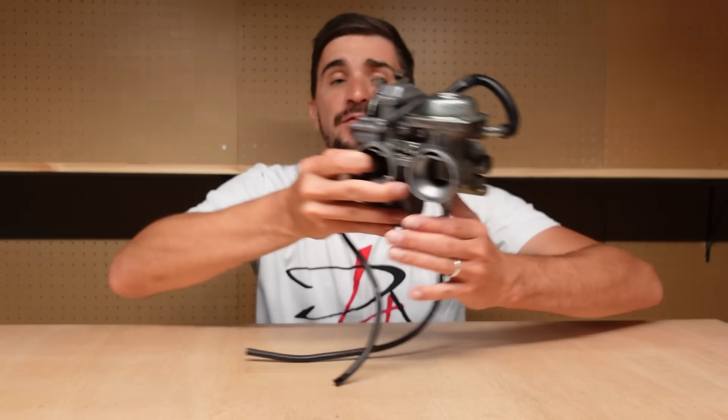They say that by looking at our past, we can predict our future. Well, here's a crystal ball from our past. This, as you can see, is a carburetor. But more importantly, it is also a bad idea.

It is a bad idea because with this particular design, Yamaha, or more precisely a Japanese carburetor and fuel and intake systems company called Teikei, tried to make this carburetor do something a carburetor cannot do: behave like a small and a big carburetor at the same time.

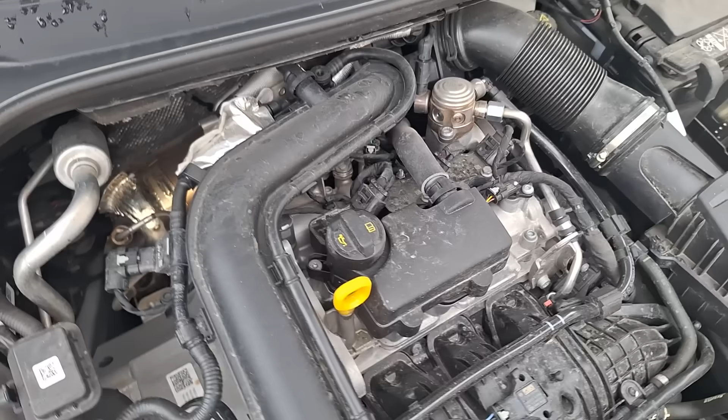Sort of like what we're doing with small 1-liter 3-cylinder engines nowadays, trying to give them the performance of much larger engines while maintaining the fuel economy and emissions of a 1-liter 3-cylinder engine. History teaches us that two-stage carburetor designs like this one were quickly replaced by simpler carburetors and/or fuel injection. They sounded great on paper, but in the real world they offered no benefits and were very hard to tune.

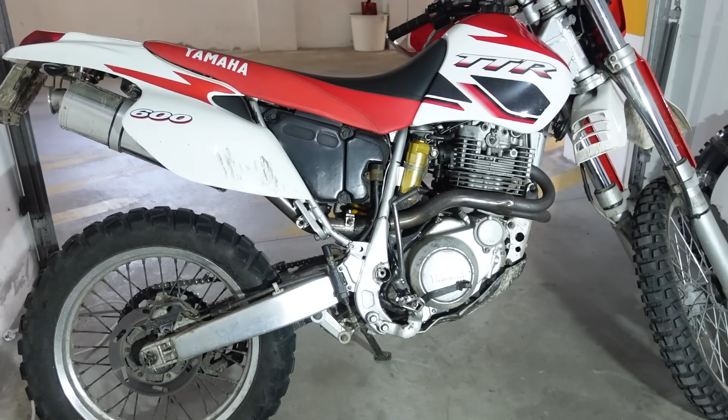But you see, there's a problem. This particular carburetor comes from my Yamaha TT600R, a motorcycle that I have a very deep and complex emotional and sentimental connection with. It is a kickstart only motorcycle that is also cursed.

I've been working on it for the past 10 months, but I can't get it to start easily and run right. And I'm this close to getting rid of it and just buying something slightly used, newer, or completely new with electric start, and just ending this nightmare.

But I really like the bike and I just can't give up on it. And so I keep giving it one more chance, and one more chance, and one more chance. I've replaced pretty much all the electrical components. I replaced the rotor. I even turned the capacitor into a lithium battery to improve things. And I replaced a bunch of other parts. I got 2 aftermarket ignition boxes, you name it.

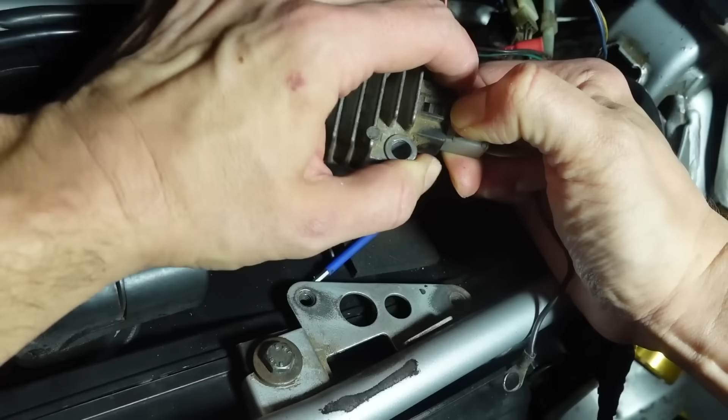I have improved things, but it still doesn't start easily and doesn't run the way it should. And now I'm 100% sure that this is the final boss, this is the culprit, because I cannot tune this carburetor to function the way a carburetor should. I'm not a carb tuning guru, but I'm also definitely not a beginner. I got a car engine to run on motorcycle carbs, and I've done numerous carburetor rebuilds and tunes, both on 2-stroke and 4-stroke bikes, but this one, no.

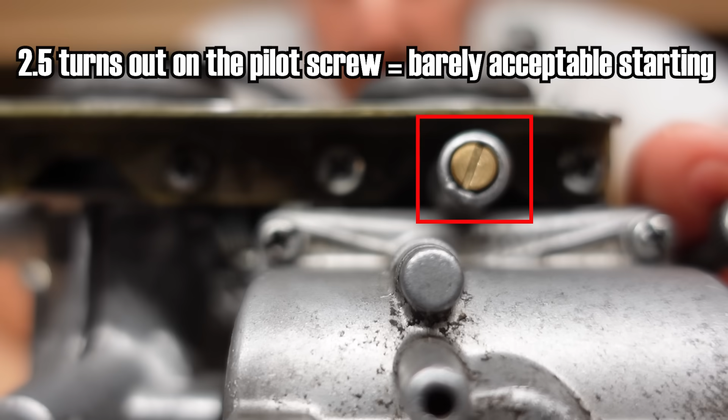Here's why. To get the bike to start, sometimes it wants 2.5 turns out on the pilot screw, the fuel screw, which is right here. With that setting, it starts sometimes. And when you start it and get the bike to warm up, you ride around.

And then if you turn the fuel screw out 3 turns, you're going to feel a very noticeable improvement in power and responsiveness from low RPM. The bike feels more alive. It is telling you that's the right setting of the pilot screw, and the factory service manual also agrees with you.

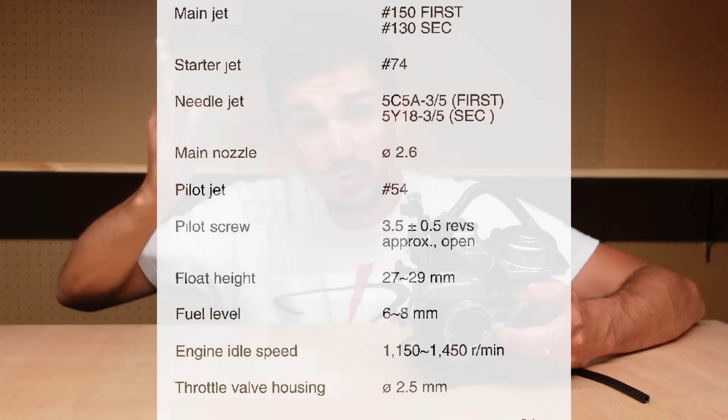But when you finish your ride with 3 turns out, come back home, turn off the bike, and then want to ride it in a few days, it will not start with that setting of 3 turns out. It will kick back most of the time, which is very annoying and kind of painful, and it also scares you.

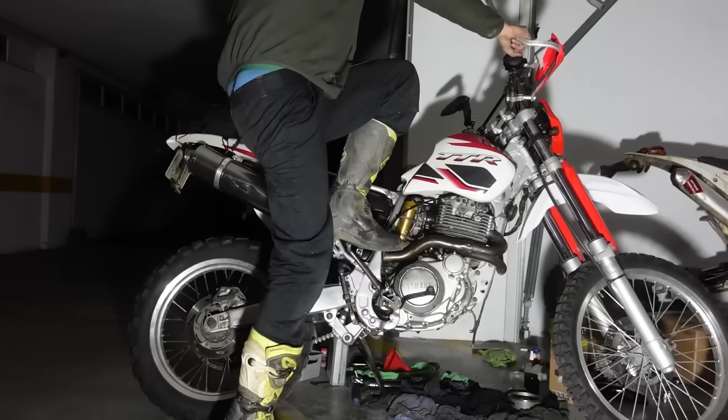Or it will sputter, or it will sort of start for a millisecond and then just die. It will do everything except starting.

And then you have to put it back to 2.5 turns out, which is not easy. You have to get under there in the carb. It's all a big pain.

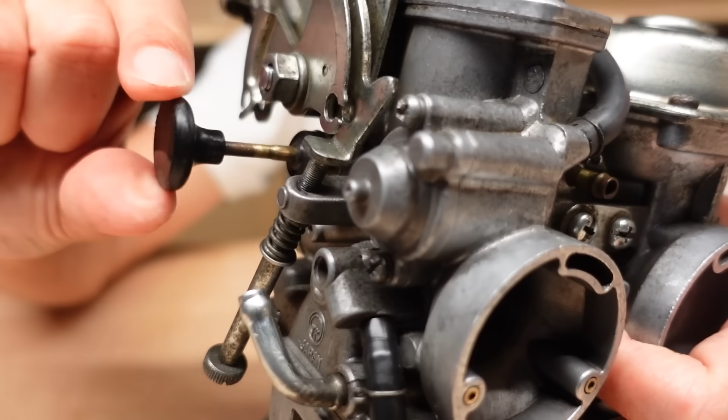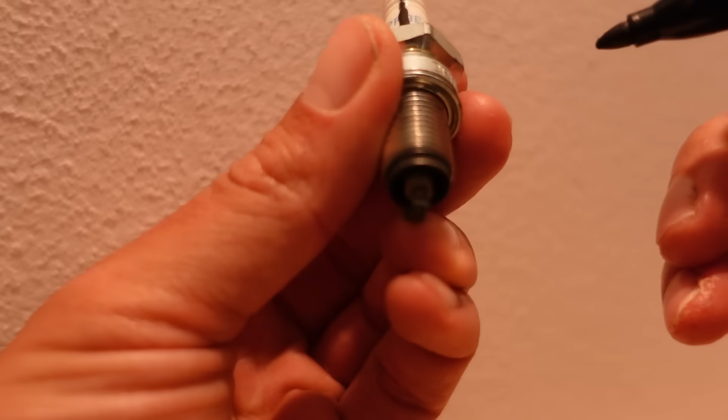And I have tried everything. When I say everything, I mean everything. I have tried every possible setting of the choke, every possible setting of the idle speed setting. I have tried priming the engine, a bit of throttle, more throttle, less throttle. A lot of throttle gives you a lot of kickback. I have tried new fuel, old fuel. I have tried different pilot jets. I have tried air filter on, off. You name it, even silly things like indexing the spark plug, increasing the spark plug gap to be larger than factory recommended. None of it works.

It will not start. But here's the final nail in the coffin of this stupid design: even if you get it to start easily and run right, and somehow manage to tune it magically to be perfect, this thing is a two-stage carburetor. So at idle, low, and sort of medium throttle, only this carburetor works. It is only this one that supplies fuel to only one of the intake ports of the engine.

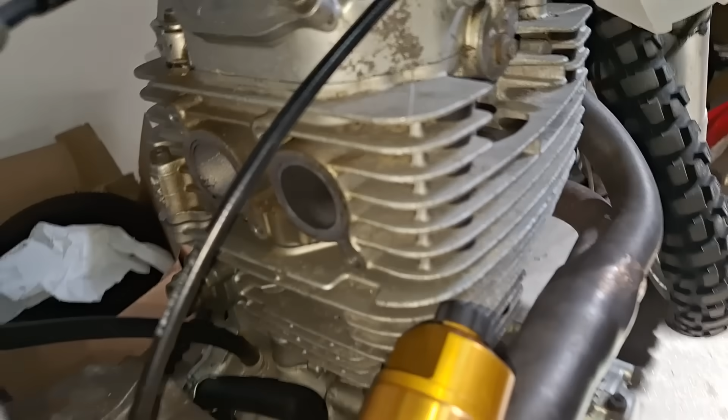As you increase the throttle, somewhere beyond half throttle and RPM, this other constant velocity carb lifts up and joins in, providing fuel to the other intake port of the engine. Because the intake ports on this engine are physically completely separated, one of them stays beautifully clean, whereas the other one gets nasty and dirty, since that carb doesn't run all the time—a lot of the time, on a 600cc single, you're just doing a bit of throttle. So even if you tune this perfectly, you will not get rid of this inherent, annoying feature of this and all other two-stage carburetor designs. It's not detrimental to engine longevity or performance, but it is just annoying.

So I decided to install a completely different carburetor onto my Yamaha, because that was the only problem it still had. It wasn't the fact that it's a 26-year-old piece of garbage—it's the carburetor.

So I decided to replace it, but there was an obstacle: the Yamaha TT600R was never a global nor a very popular model, so the aftermarket for it is pretty much pathetic. Yamaha themselves still only make some bolts, some gaskets, and the oil filter for this bike. That's it. Basically, nobody really cares about this bike anymore.

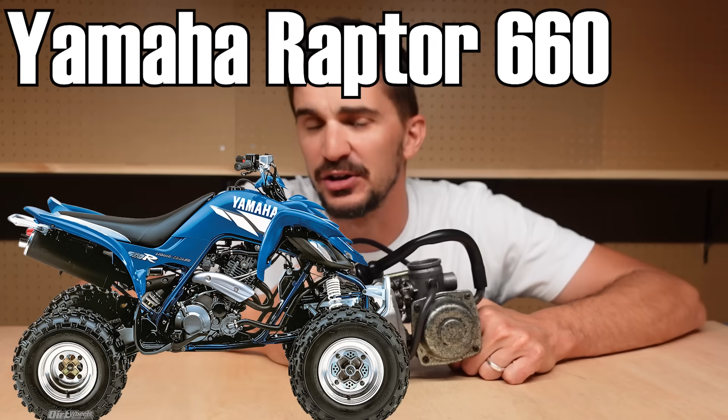It has 60 more cc, but it also has a beautiful, and most importantly conventional, Mikuni BSR 33 carburetor. These bore diameters are the same in both carbs, and the distance between the bores is also the same, which means all I needed was some very mild mutilation of the stock intake boots to get the new carb to beautifully fit onto my bike.

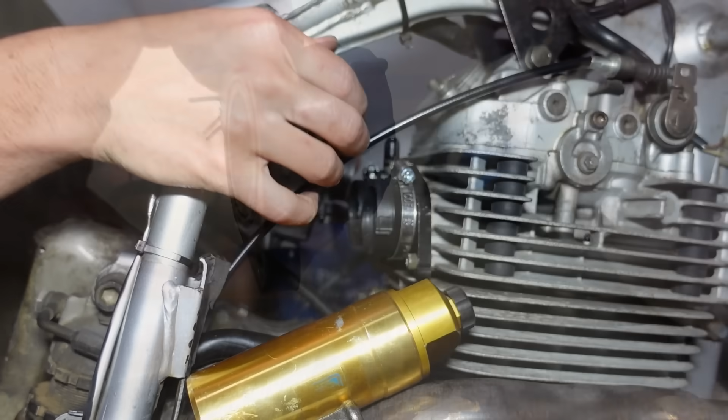Another good thing is that you can find dirt cheap Raptor 660 knockoff carbs on Amazon, which allows you to experiment inexpensively—which is exactly what I did.

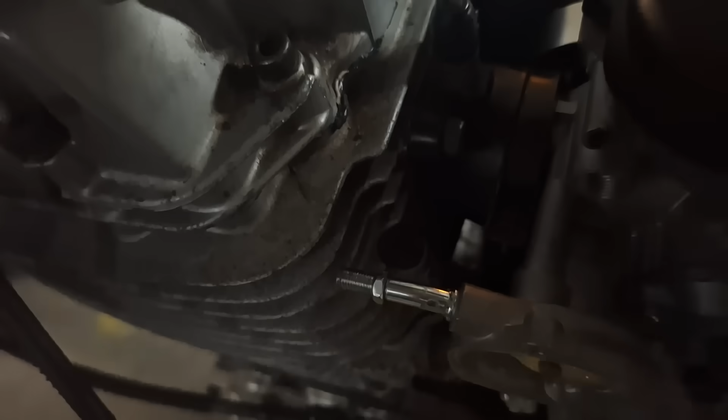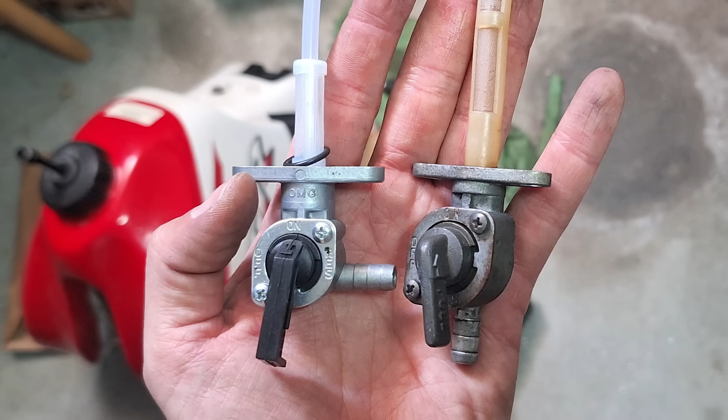Of course, when you try to do silly conversions like this one, nothing is straightforward. For example, the throttle cable tube was hitting my cylinder head, so I had to make a totally different one using a hose fitting. The stock fuel petcock also didn't clear the new carburetor, so I had to get a different one, but then the stock choke didn't clear the new petcock, so I had to get a different choke cable with a curve in it to clear the petcock. Surprisingly, the choke from a Harley Davidson fits perfectly. All of these were problems, but they were easy enough to solve.

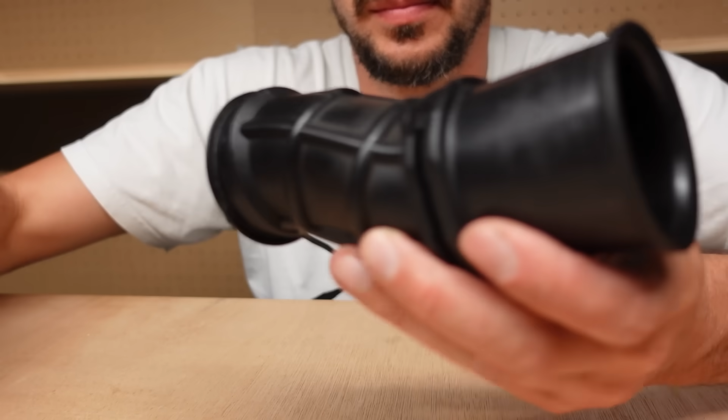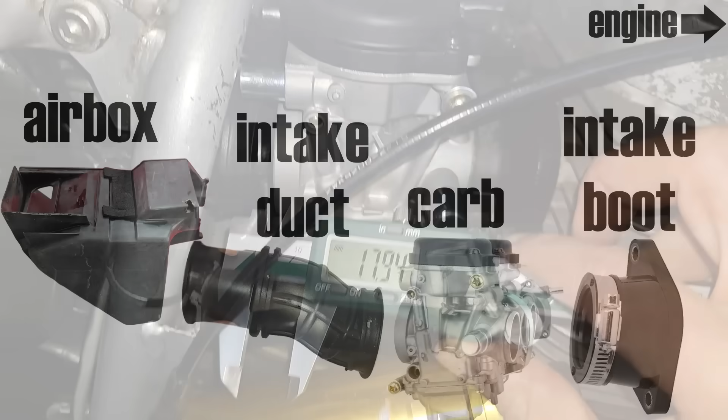What followed was a problem that was not easy to solve. These are the stock intake hoses which connect the stock airbox to the carburetor. With the new carburetor in place, they were now too short, offset, and one of them had a completely wrong diameter, meaning there was no way to connect the new carb to the airbox. I didn't know what to do, so I googled around.

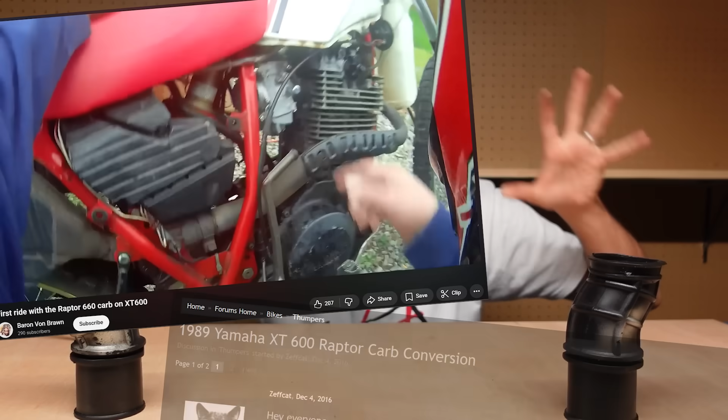To my surprise, I found a few more people online doing this exact conversion: Raptor 660 carbs onto a Yamaha TT or XT600 motorcycle. But the solution they found was to simply completely eliminate the stock airbox and install tube or pod filters, or whatever you want to call them.

This might be fine for a street-only motorcycle, but I ride this bike pretty much exclusively off-road. Off-road there's a lot of dust and dirt, and pod filters simply don't filter as well as off-road oiled filters, especially when completely exposed to the elements, so engine longevity might be negatively impacted. Also, exposed pod filters get very dirty very quickly, so you'd have to change them all the time. And if you ever drop your bike during a water crossing, they get completely soaked with water, water probably gets into the engine, and then starting or kick-starting your bike again is pretty much impossible.

And so in my case, the airbox had to stay. It's simply the best solution for an off-road motorcycle. And to adapt the new carburetor to the airbox, I decided to undertake a pretty ambitious DIY adventure to do something that I have never done before: design and make from scratch a completely custom rubber flexible intake hose, aka intake duct.

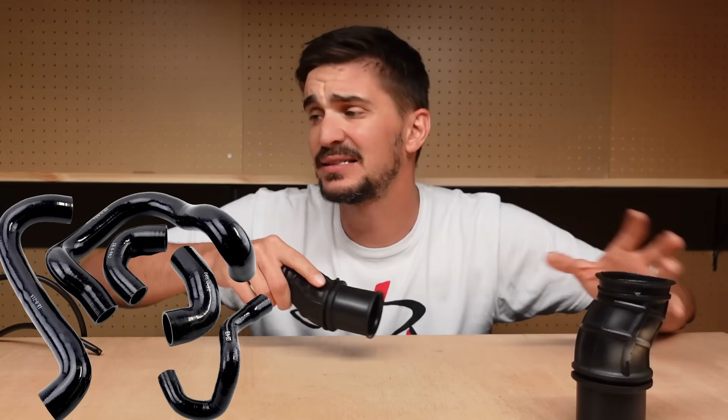As you can see, in the end, I did it, but it was not straightforward. But I did learn many valuable and useful DIY lessons, all of which I'm going to share with you in this video, so that you too can make completely custom intake hoses and ducts, adapt pretty much any carb or throttle body to any engine, make custom intercooler hoses, turbo hoses, other intake stuff, coolant hoses, you name it. You can do all of it yourself.

Before I even started the project, I decided that I was going to 3D print the new intake ducts in my Bambu Lab H2D printer using Bambu Lab TPU filament, thermoplastic polyurethane. I decided this because in the past I had already printed successfully some simple TPU parts, some gaskets, and so I figured an entire intake duct shouldn't be much harder.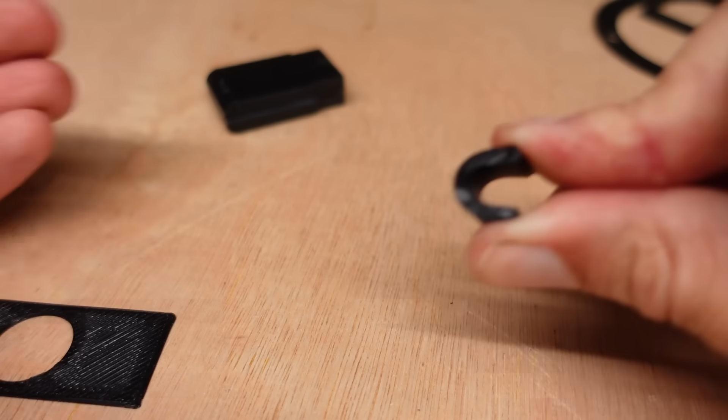But before I could 3D print anything, I needed a 3D file, a CAD file of what I was going to print. And I needed to draw something similar to the stock pipes, but a bit longer and offset a bit differently, with a different diameter on one of the pipes.

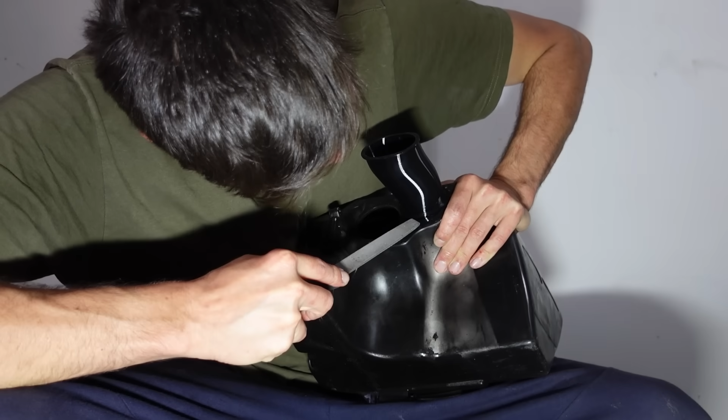The problem is that these are extremely complicated parts, way more complicated than anything I have ever drawn before. For example, in the airbox there's a little notch, and that notch corresponds to a little tab or protrusion on the pipe that locks the rotation of these pipes in the airbox. The two pipes are different because they're mounted at different heights on the airbox. They have different offsets, some flat parts, some curved parts, and they are irregular and offset in pretty much every plane. So to get this to fit, I have to get every dimension absolutely correct, because everything has to correctly reference everything in all three dimensions for this to fit even closely.

And I know what you're thinking: hey, get a 3D scanner. This is the perfect candidate for 3D scanning. And yes, it is—it's black, it's not shiny, it's complicated. But 3D scanners are not cheap, and I was not going to get one just for the sake of this one project. Yes, I know people do 3D scanning with their phones, but I have an ancient, cheap, horrible Android phone with a horrible camera, and I was not going to upgrade for the sake of this one project.

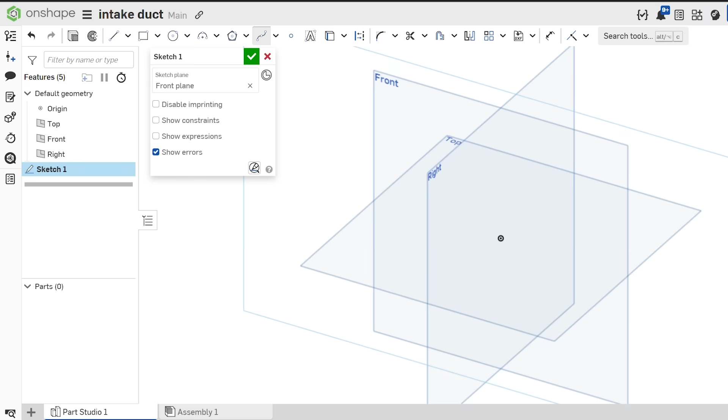And I was confident that it can be done more simply. So I went full old school and just measured everything by hand using a caliper, trying to get as many dimensions as humanly possible. After that, I opened up Onshape, drew a spline based on the dimensions I took, did a sweep along that spline, and then shelled out the resulting part to create my intake pipe.

Once I had my drawing, I opened it up in Bambu Studio and printed it. I used the automatic TPU printing settings, which the system selects for you when you choose the Bambu Lab TPU filament, and the pipe came out absolutely perfectly on the first try. And here it is, a fully 3D printed intake duct. It looks amazing, but I'd be lying if I said I was surprised by how well it came out on the first try, because honestly I'm kind of used to things working perfectly on the first try with my Bambu Lab H2D. However, what did surprise me was just how insanely strong this thing is.

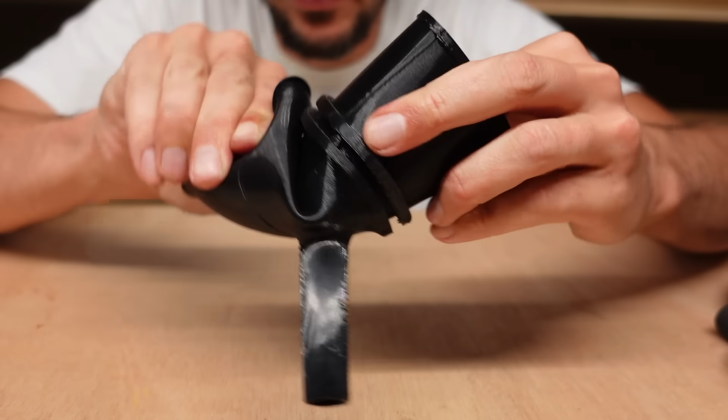You can stab it with a screwdriver. You can try to twist it and tear it apart. You can do whatever you want with it, but it will stay intact. It is just as strong as the factory rubber part. The strength caught me off guard to the point that I wanted to find its limits. So I quickly drew up a super simple container to test the maximal internal pressure something like this can take. After the H2D printed past this hole, I hit pause.

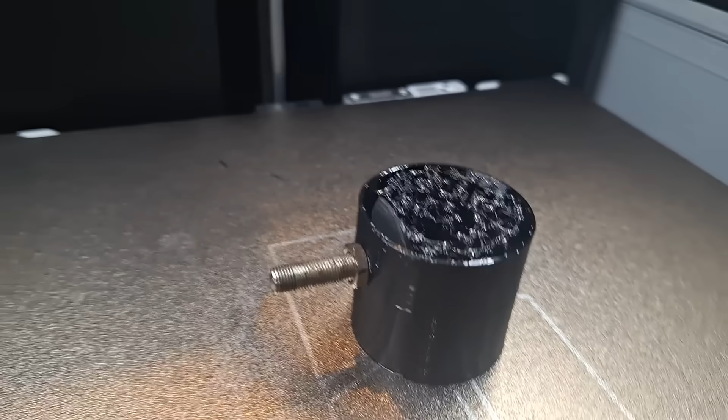I then moved the bed down and inserted a tube valve through the hole. And then I let the printer resume.

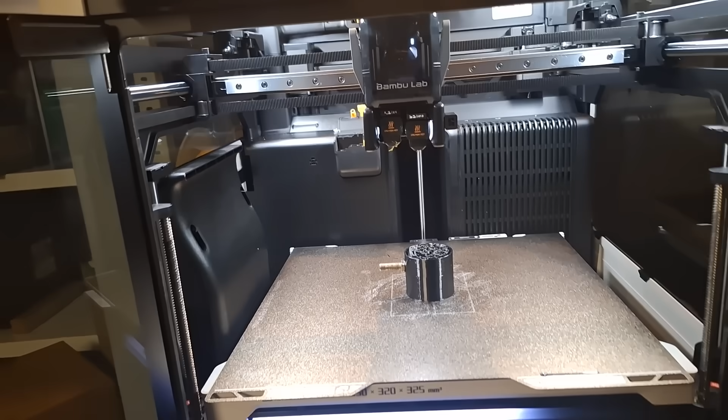My Bambu Lab H2D automatically references everything, so once I hit pause and resume, I can do whatever I want in the meantime, but it remembers exactly where it stopped and where it needs to continue. So the only thing I have to do is hit pause and resume.

And this of course means that you can get very creative and insert all kinds of things into all kinds of holes and slots and then continue printing, and they're going to remain trapped or fixed in their hole or slot. This opens quite a few very interesting DIY possibilities.

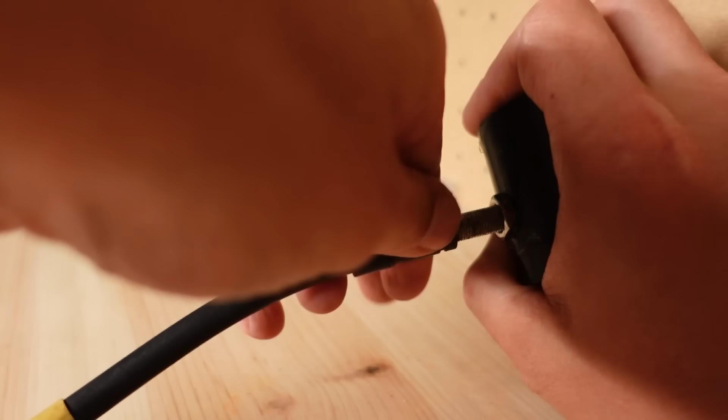Once the part was done, I let it settle and stabilize overnight, and then tomorrow I tried to inflate it to a pressure of 150 psi, which is approximately 10 bar.

I can't believe it inflated to 150. I really hope the valve stem is leaking or something, because I do not want to go there now. No, it's holding 150. This is insane.

Okay, this is version 2.0, which I did make a bit thicker because the previous version, the one that you saw printed, that was thinner, 1.5 millimeter wall thickness. This is 3.5 millimeter wall thickness, because that helps the valve stem seal a bit better.

My whole method of valve stem insertion isn't the best. But honestly, I still can't believe it's holding 150 psi or that it survived that for any amount of time. That's insane.

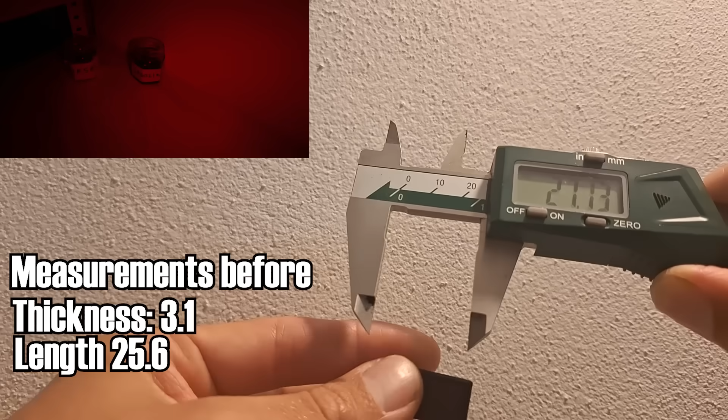Another test I did in parallel is that I dunked my old TPU seals inside gasoline and diesel and let them sit for 3 days. They remained perfectly intact and completely unaffected by either one of the fuels. They didn't swell or become weak or brittle or anything else.

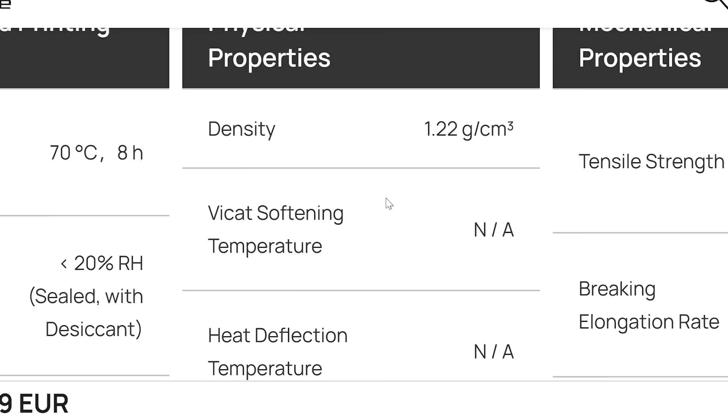So it's super strong, it resists both gasoline and diesel, it can take high internal pressures, it's already well known that TPU can take coolant without any issues, and it has a melting temperature of 183 degrees Celsius, which means that this thing is right at home on a motorcycle or a car, right at home in the engine bay. You can make any kind of duct, hose, you name it.

Back when I was doing my Project Underdog Turbo 4AFE Toyota MR2 Mark I, I didn't have a 3D printer, but honestly, if I had, it would have made things so much easier, because what we were doing the whole time is fabricating little metal brackets and things so that we can position things to fit the only kind of hoses that you can find in the aftermarket, which is you have straight or 45-degree bend or 90-degree bend, and that's it. And you have to work around that, but not with this.

But printing TPU is a bit different. It's not harder, just a bit different to printing your classic plastic type filaments.

And in order to achieve these kind of results that I have achieved here, there are some very important things that must be observed. Number one, you have to dry the filament beforehand. This is a must. It is non-optional. I recommend drying 16 or even 24 hours.

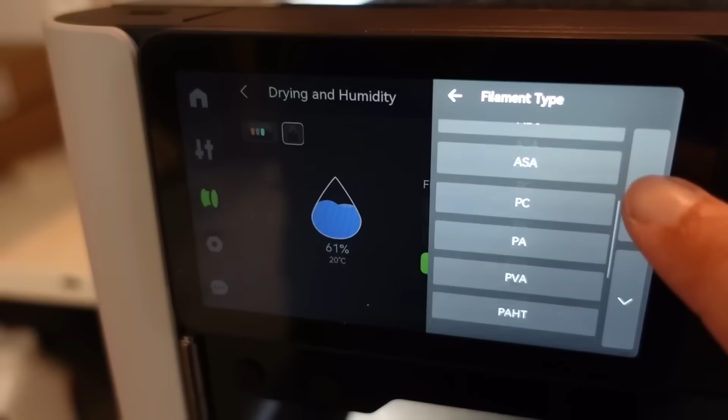I use the AMS HT, HT being high temperature. I love it because it fits perfectly into the Bambu Lab ecosystem. You just load the filament, you choose what kind of filament you want to dry, and then it automatically selects the temperature and the drying time, and then you can choose whether you want to rotate the spool or not, and that's it, you're done.

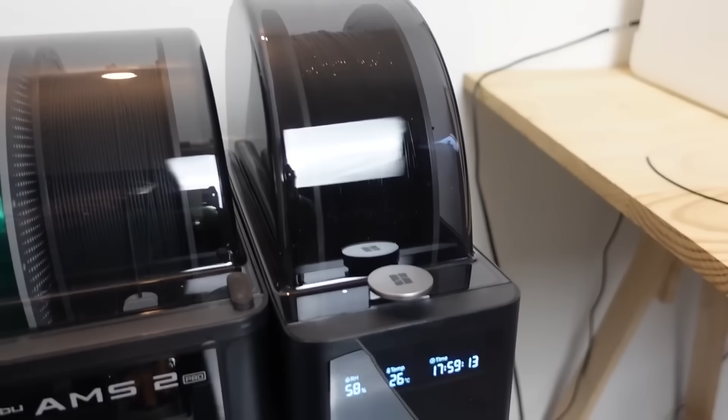But the best thing about it for me is that you can start new drying cycles using just your phone. You can load the filament, and then you don't have to be at home when one drying cycle finishes and you want to start another one. You just access the AMS HT through the Bambu Handy app and just start another drying cycle. This is incredibly convenient. I used it hundreds of times already, because often I like to do 2 or even 3 drying cycles, and when one ends, I'm often not at home, and this makes it super convenient.

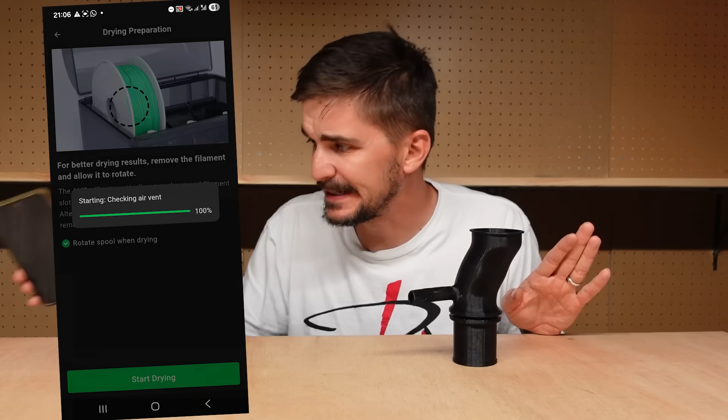The other very important thing once you're done with the drying is how you load the filament into your printer. I highly recommend to get rid of all PTFE tubing, hoses, whatever you want to call them. Load it manually directly into the extruder. This way the TPU filament will never get stuck. You will never have a failed print because of stuck filament.

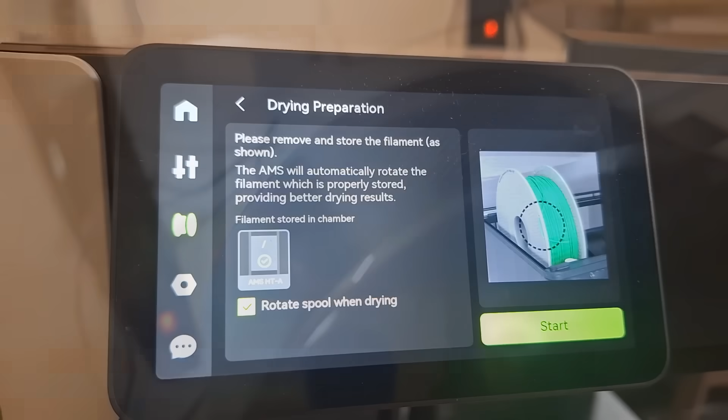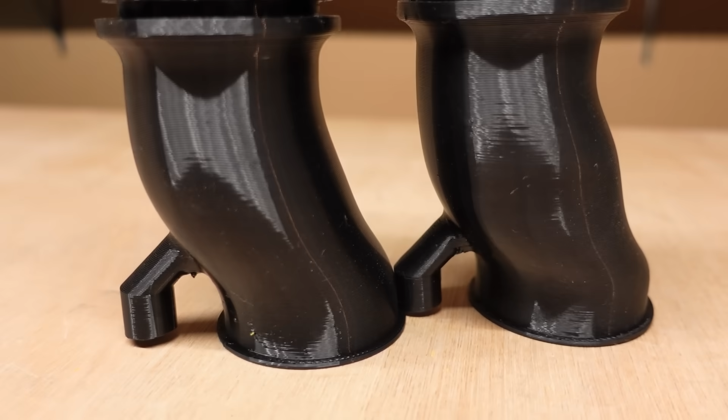A pro tip here is to keep the filament inside the AMS HT while you're printing. Load it manually through the little convenient hole in the lid of the AMS HT and then into the extruder, and then set another drying cycle while it's printing, only without rotation this time, so the extruder can easily pull the filament. This prevents the filament from absorbing moisture during the print, and it ensures perfectly consistent quality across the entire part, which is the secret sauce to ultimate strength.

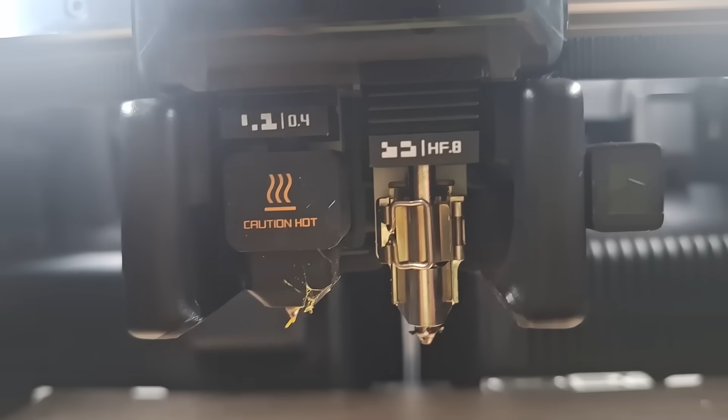The other two important bits are to use a 0.8 high flow nozzle. That's what I used, and this thing is worth its weight in gold because prints that lasted a few hours are now 20 to 30 minutes, and the thick big extrusions make the part stronger.

And finally, while printing, remove the lid of the printer and keep the door totally open, because TPU is extruded hot but needs to cool down as fast as possible for ultimate strength and performance.

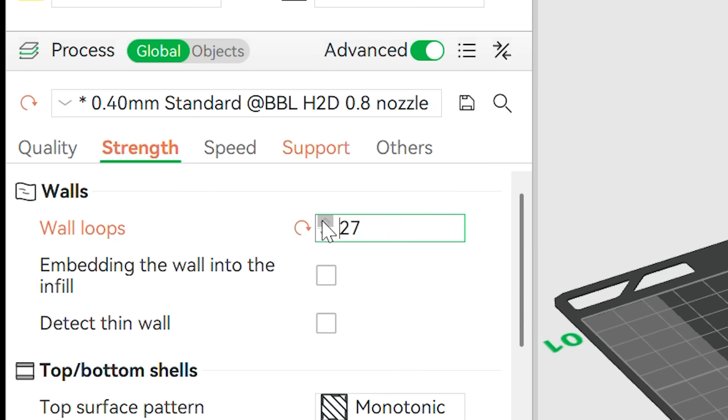When it comes to the printing settings in Bambu Studio, make sure to increase the number of walls to some silly number like 20 or 30 to ensure that the part is solid TPU without any infill, which leads to ultimate strength. All the other settings I leave as is, and they are automatically pre-selected by the software when you choose the TPU filament.

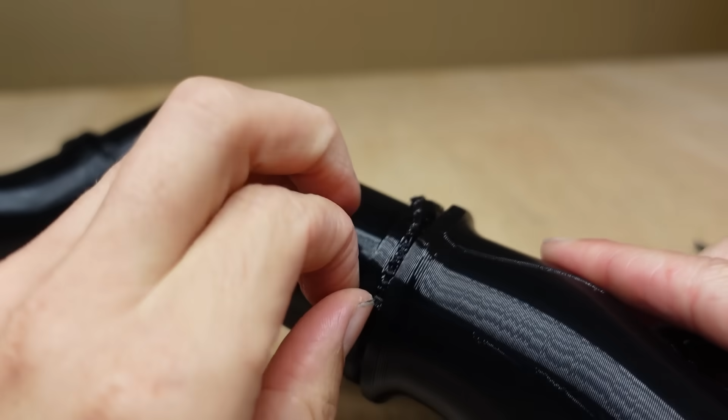The only thing I have changed is the top and bottom Z distance. I increased this to 0.3. This makes support removal easier while still retaining perfect strength. I have used same material support for convenience and simplicity.

I'd also like to point out just how cost-effective this is, because I printed out all of these gaskets and seals and all of these intake tubes, plus 2 more that are on the bike, from just one roll of Bambu Lab TPU, and I still have around 40% of it left.

And the size of the Bambu Lab H2D means that you can print much larger parts than the ones I did. So I had made a part which was super strong, very resilient, also very pretty, and also a total failure.

It was a failure because my dimensions were totally off, as much as 5 or even 10 millimeters in some places. The only thing I got right were the diameters, these two at the ends, nothing else. I just couldn't fit this properly.

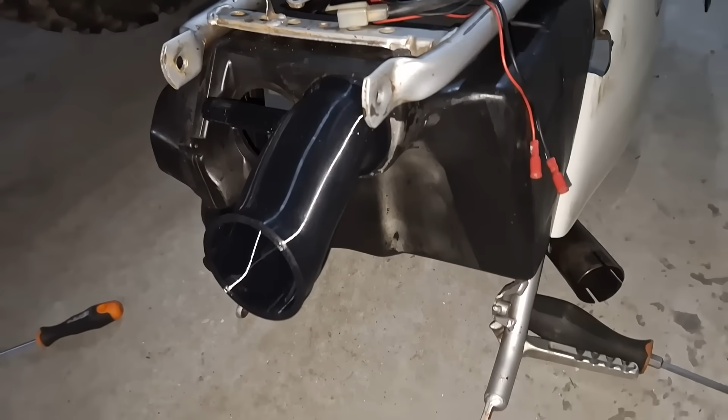This idea to use this hose takeoff and then attach or glue a regular hose from the parts store and then connect that to the diaphragm breathers on the carb, that didn't work either, because I overestimated the amount of space available within the confines of the frame. There's not a lot of space at all. This didn't work. This thing just didn't fit.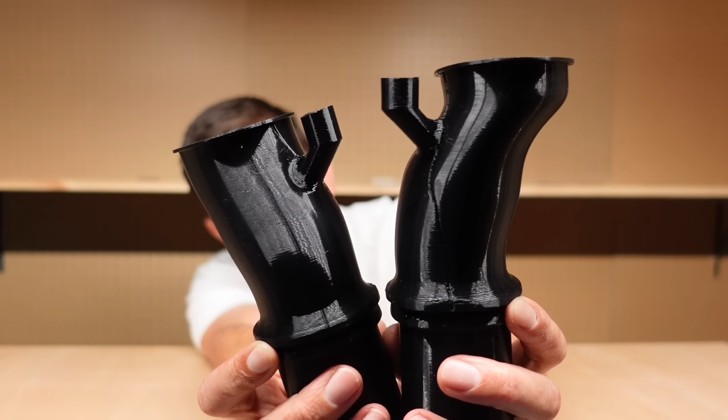So I set it aside, went back to measuring, tweaking, drawing again, and I made version 2.0. As you can see now, the diaphragm breathers are integrated into the tube, so there's enough space. I can just push them onto the carb, but this was also a failure.

I got the angle of one of these right, the other one I got wrong in reference to the center of the main carb diameter. I got other things wrong that were somehow previously right before. This didn't fit either.

And then I realized that trying to get it to fit, trying to get dimensions right like this by measuring by hand with the caliper, essentially boiling down to eyeballing things, it was never going to work. So then I got to thinking and tried to be creative, and eventually I came up with a sort of very simple and kind of primitive approach that was also kind of genius.

What I did is I took a perfectly frontal, straight photo of the stock intake hose. I then imported the photo into Onshape and resized it to match a known correct dimension. After that, I just drew circles along the path of the hose photo, and I lofted all the circles together and then shelled out the part to obtain my final hose shape.

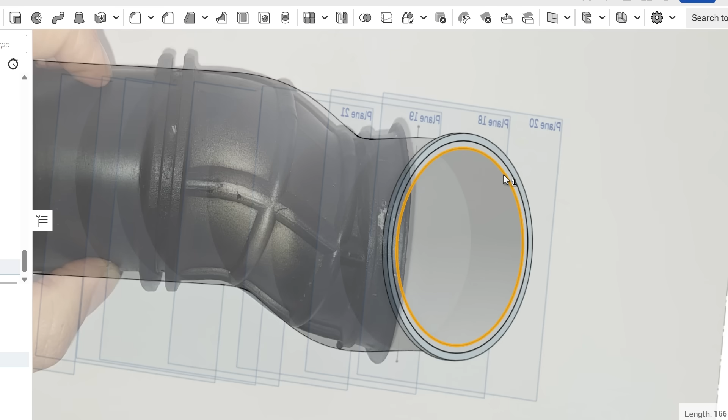I did the same trick with the carburetor. I took a perfectly frontal photo and then resized the image in Onshape until the diameter of the intake matched. I was now able to measure the angle between the center of the carb and the diaphragm breather with perfect accuracy, which meant I could accurately implement it onto my hose as well.

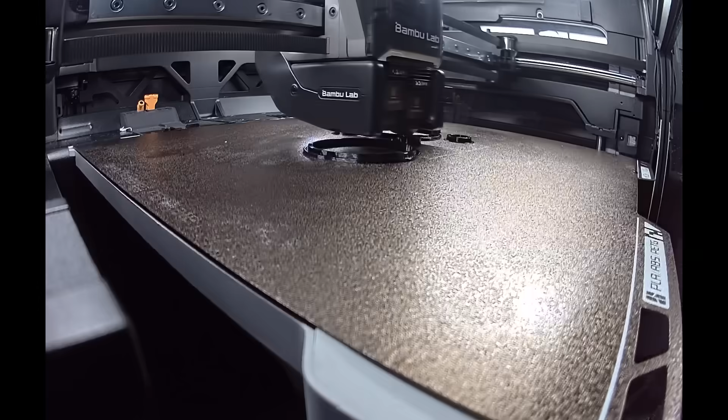I printed the new hoses out and voila, they fit perfectly. There you go, 0% 3D scanning, 100% accuracy. All it took was the right software features and a bit of creativity. Once I had the hoses ready, it was time to install them and put the bike back together.

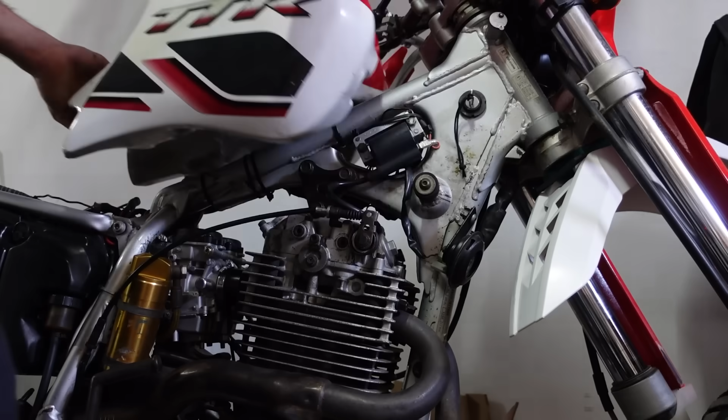And once the bike was assembled and the moment of truth came, I couldn't try to start the bike. You see, this motorcycle kicked back so many times in the past that I think it probably traumatized me or something. I didn't try to kickstart it in a month, and it seems that during that month, somewhere in my subconsciousness, a very strong reflex or fear had formed, and I just couldn't start the bike.

It was a very weird, very strange experience. Never happened to me before, but I just couldn't try to start it. So what I did is that I pushed it up the slope in front of my garage and then tried to just push start it, and to my great surprise, it started on the very first try.

This never happened with the original carbs with 3 turns out on the fuel screw. It would never push start. I tried many times. The bike would just clatter or make some weird noises or lock up the rear tire and just slide across the garage. But now it started on the first try, and to my great surprise, the Amazon carb seemed to have pretty good fueling out of the box.

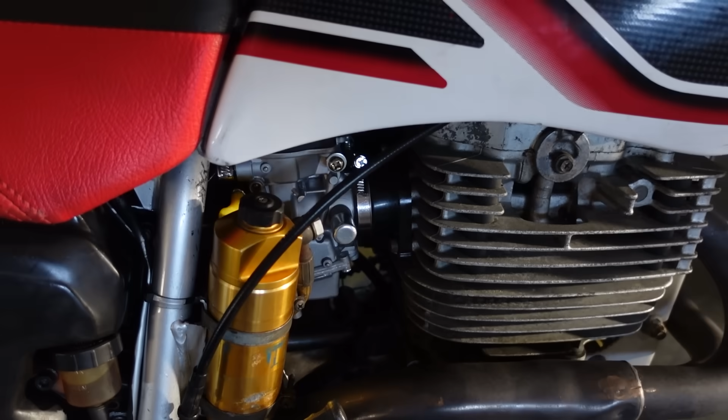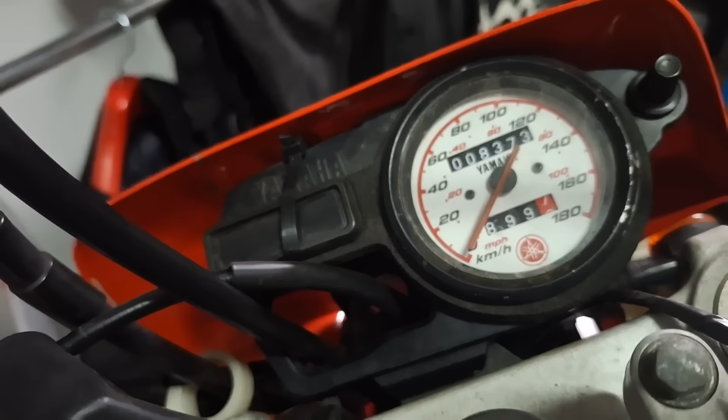The rational modern approach would be to just get rid of this motorcycle and buy something modern, more efficient, whatever. But I want this bike. I like this bike. I like its analog, brutally simple mechanical nature. I like the fact that I don't have to turn off ABS and traction control every time I start the bike because this bike doesn't have any of those electronics. I like the fact that it has a needle instead of a LCD. I like all of that.

I'm not saying that modern bikes are bad. I might buy one sooner or later. It's great to have that too. But I also want to have the freedom and the ability to keep this bike, to have it and to improve it and to keep it alive without having to be at the mercy of the aftermarket or Yamaha.

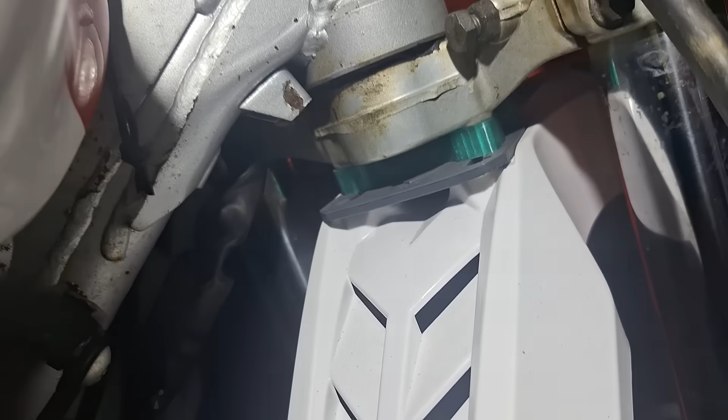And that's what 3D printing is allowing me right now. I have a bunch of other 3D printed stuff on this bike. For example, I made an adapter for the front mudguard. I broke the original one. None of the aftermarket ones fit. Original ones are insanely expensive and rare. And then I just made a little weird adapter to fit whatever I wanted. It's little things like that that really help.